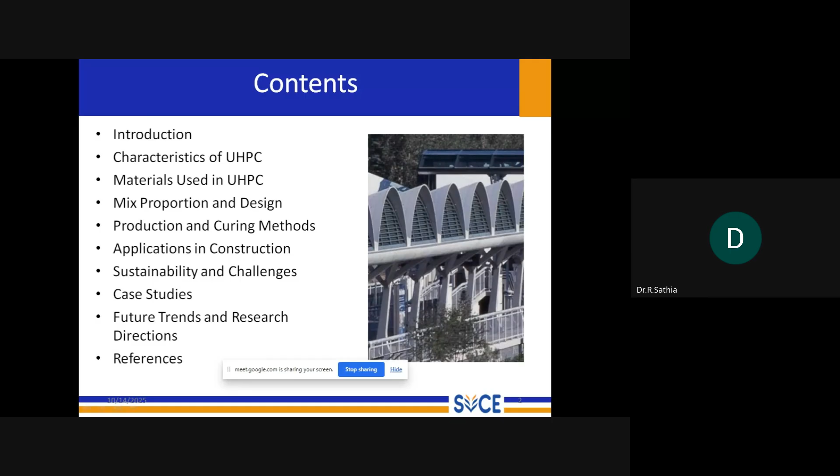Finally, we'll look into the future trends and research directions, where we'll explore the integration of AI, 3D printing, and bio-based materials. So finally, we'll conclude, and the last slide will be the reference slide.

Coming to the introduction of UHPC, which is nothing but ultra high performance concrete. As we all know, conventional concrete is made up of fine aggregate. In simple terms, to explain what this ultra high performance concrete is: in conventional concrete, we use cement, fine aggregate, coarse aggregate, and water combined together to make concrete. Whereas in ultra high performance concrete, the coarse aggregate part is eliminated.

It is mainly a cementitious composite material characterized by exceptionally high strength, durability, and ductility compared to conventional concrete. It is a material mainly made up of cement, supplementary cementing materials, admixtures, and fine aggregates. Here the coarse aggregate is eliminated to produce a uniform bulk mass.

So in order to improve the ductility, we are going to use fibers. Normally in practice, steel fibers are added to improve the ductility part of UHPC.

So UHPC is a class of advanced cementitious composite characterized by exceptionally high strength, durability, and ductility compared to conventional and even high performance concrete. So it is not just improved concrete, it is a fundamentally different material with a tailor-made microstructure.

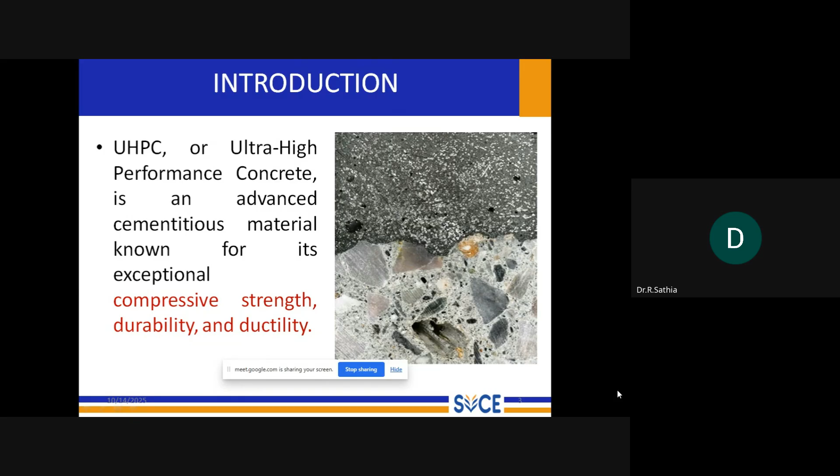Coming to the composition of UHPC, we can break down its composition into categories: the compressive strength, the post-cracking tensile strength, durability, and the unique properties of this UHPC.

Coming to the composition, it is a cementitious material. UHPC is a carefully engineered composite material. Its formulation involves optimized gradation of granular constituents, where particle sizes are selected to pack together with extreme density. So the particle packing density is a main important parameter to be considered in the design of UHPC.

It has a very low water cement ratio compared to normal conventional concretes, where it is 0.35 to 0.4 and up to 0.5. Whereas in ultra high performance concrete, the water cement ratio normally adopted is less than 0.25. So you can assume the comparison between your conventional concrete and your ultra high performance concrete.

So although the water cement ratio is 0.25, how is this workability achieved? That is the main thing which we have to concentrate on in this ultra high performance concrete.

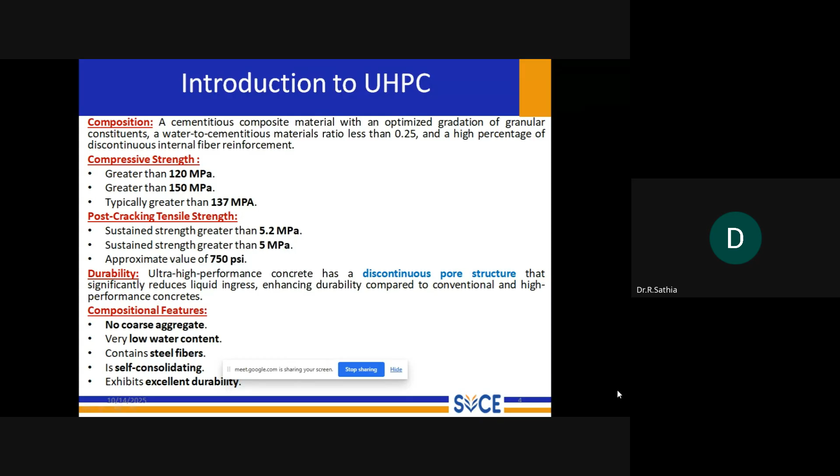To summarize, UHPC is a no coarse aggregate concrete with a very low water cement ratio, less than 0.25, and the ductility is improved by means of steel fibers. Although the water cement ratio is less than 0.25, it is said to be a self-consolidating or self-compacting concrete, and it also has excellent durability.

Although there are a lot of concretes now in practice, why and what is the need for this UHPC? UHPC typically utilizes, as we said, no coarse aggregate, low water cement ratio, fibers, and is self-consolidating with excellent durability.

So why do we need this? Why do we need such a material with low water cement ratio, with fibers added, and with accelerators or workability improving agents? What is the need for this UHPC?

Modern construction materials demand durability, corrosion resistance, and sustainability. Conventional concrete often struggles in harsh environments like marine regions or areas that use de-icing salts, which leads to cracking, corrosion of rebar, and high maintenance costs.

This UHPC directly addresses the limitations of inadequate toughness, poor crack resistance, and the frequent repairs needed in the case of conventional concrete. Furthermore, there is a shift in architectural trends and needs.

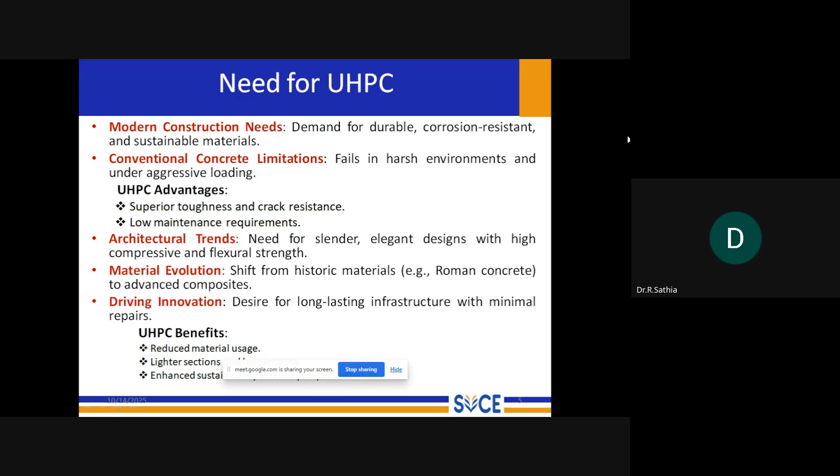Coming to the history of concrete, it is a hybrid material which combines the properties of three different types of concrete. The first is your self-consolidating concrete, the next is your high performance concrete, and the other is your fiber reinforced concrete.

UHPC is an easy flowing, self-consolidating material with the nature of SCC. It has the property of self-consolidating nature of SCC, so it fills most complex forms effortlessly.

The second is it possesses the superior strength and durability of high performance concrete. The next is the fiber reinforced concrete aspect, which gains increased ductility and post-cracking strength from the fibers added to produce this UHPC.

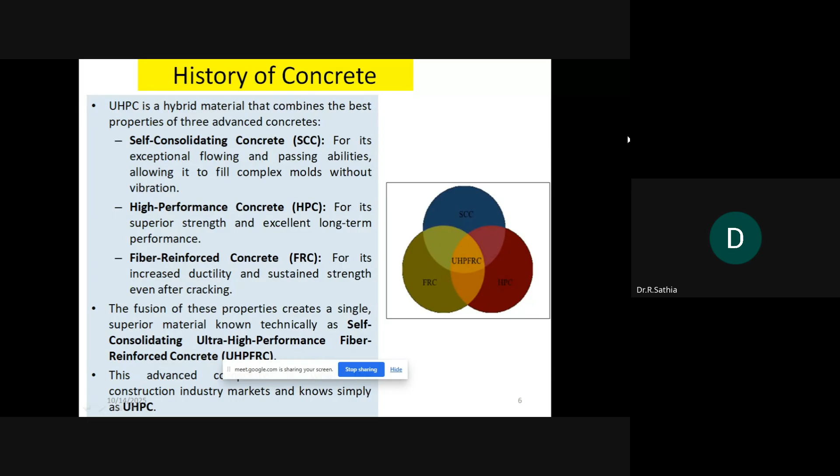By integrating these three powerful characteristics, we get a single advanced material known as self-consolidating ultra high performance fiber reinforced concrete, otherwise called UHPFRC, which is nothing but your UHPC.

Why this UHPC? New materials have always redefined what is possible in construction. This UHPC represents one of these fundamental shifts, much like the introduction of steel, when in olden days we built structures using only concrete.

Later, when steel came, it was another evolution of concrete. The UHPC presents one of these fundamental shifts, introducing much like the introduction of steel, leading to the creation of trusses and suspension bridges.

Next, UHPC was first developed or originated by the US Army Corps of Engineers in the late 1980s, and it was commercially launched in the year 2000.

Its availability prompted the Federal Highway Administration to initiate major investigations for highway uses, which subsequently spurred wide university research. The first bridge in North America was a pedestrian bridge in Canada, built in 1997. Globally, 34 research projects across multiple institutes were initiated and are ongoing, showing that the material is available and economically feasible.

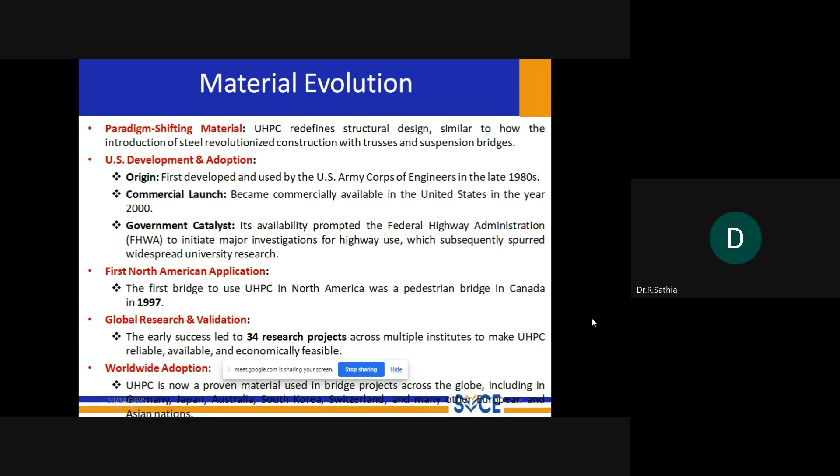Coming to performance criteria, as discussed, UHPC has a high compressive strength, 10 times that of traditional concrete. Compressive strength is the ability of the material to resist bending under loads. Normal concrete used in bridges has a compressive strength ranging from 20 to 50 megapascal, whereas UHPC has a strength range from 150 to 250 megapascal.

Coming to workability, it has a self-compacting mix. It can be developed using a self-compacting mix by achieving optimum particle size, and this workability is achieved by using a high range of super plasticizer.

Next is durability. While UHPC's strength is impressive, its durability further exceeds expectations. Durability is measured by how the material performs under extreme conditions - freeze-thaw resistance, chloride resistance, and abrasion resistance - all part of the durability aspects. UHPC's properties are similar to hard rock, resistant to chemicals, chloride, and fire, with zero maintenance.

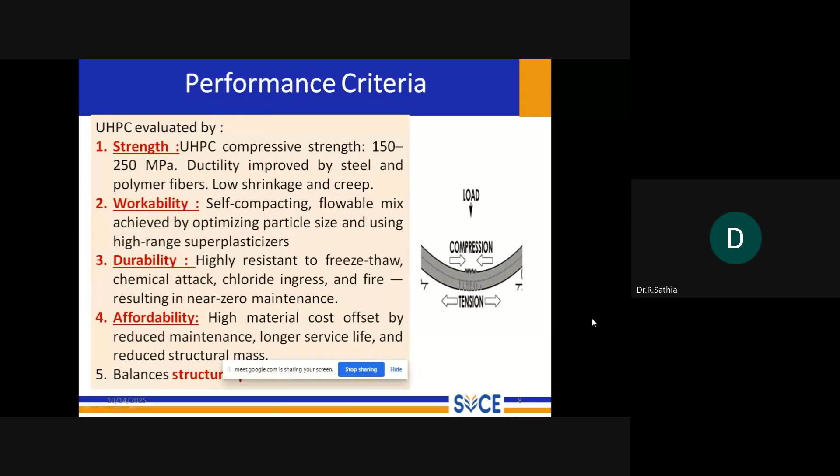Next is affordability. Although UHPC has high strength, thinner sections can be made. Comparing the cost of normal conventional concrete to UHPC: conventional concrete costs around 14,000 per cubic meter, whereas UHPC costs range from 2 lakhs to 2 lakhs 15,000 per cubic meter. So you can see the cost comparison between conventional concrete and UHPC.

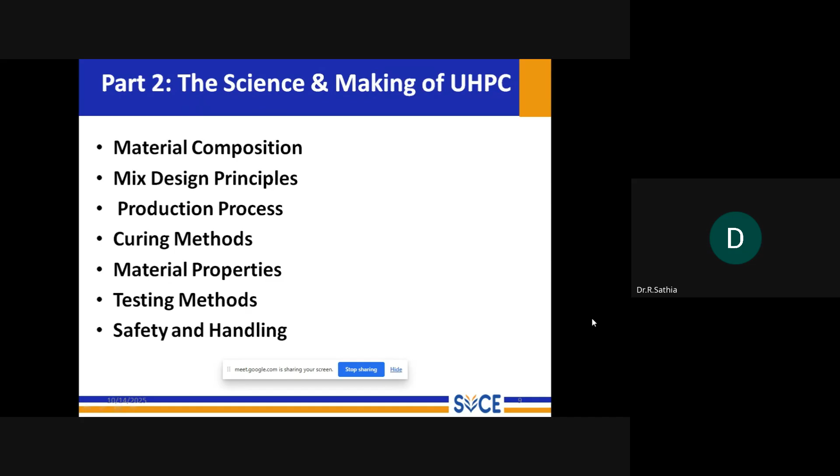The second part of my presentation is the science behind the making of UHPC, which comprises the material composition, mix design principles, production process, curing methods, material properties, testing methods, and safety and handling.

The materials mainly used for production of UHPC are powders, superplasticizers, and organic fibers. The general formulation of UHPC consists of high binder content, including Portland cement and supplementary cementitious materials like silica fume and quartz flour. Coarse aggregate is removed from UHPC, as already discussed, to avoid formulation of high voids and to create a densified interfacial transition zone around the aggregates. This elimination of coarse aggregate eliminates the weakest region within the matrix.

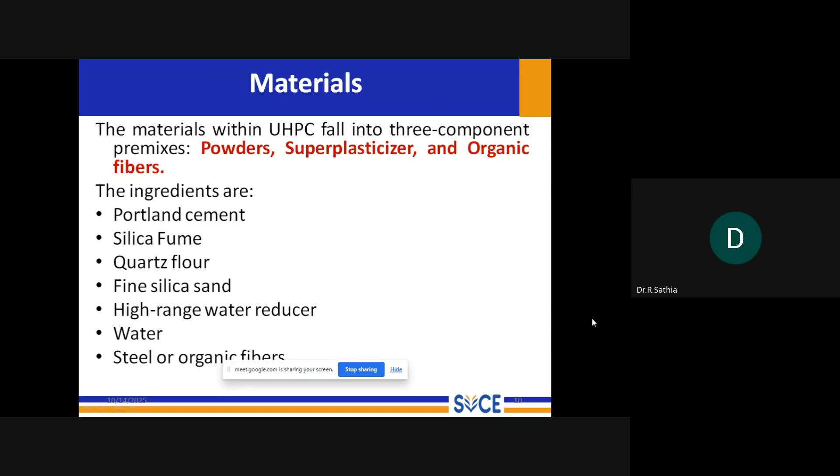Next, the coarse aggregate is replaced - now that we've eliminated coarse aggregates, how is strength achieved, and how do we achieve dense packing? The coarse aggregate is replaced by well-graded fine sand to ensure high packing order. This UHPC mix design incorporates two different types of chemical admixtures: high range water reducing admixtures and concrete setting accelerators. Finally, micro-sized steel fibers are incorporated to increase mix strength and ductility.

Here you can see the proportion composition of UHPC. This is not the universally adopted proportion, but one of the proportions used in preparation of UHPC. Portland cement is 712 kg per cubic meter, fine sand is 1020 kg per cubic meter - since we've eliminated coarse aggregate, UHPC does not contain it. Silica fume is 231, ground quartz is 211, high range water reducing admixture is 30.7 kg per cubic meter, accelerator is 30, steel fibers are 156 kg per cubic meter, and water added is 109. In normal conventional concrete, the water normally adopted is 185 kg per cubic meter, so you can see the comparison in the amount of water added for UHPC.

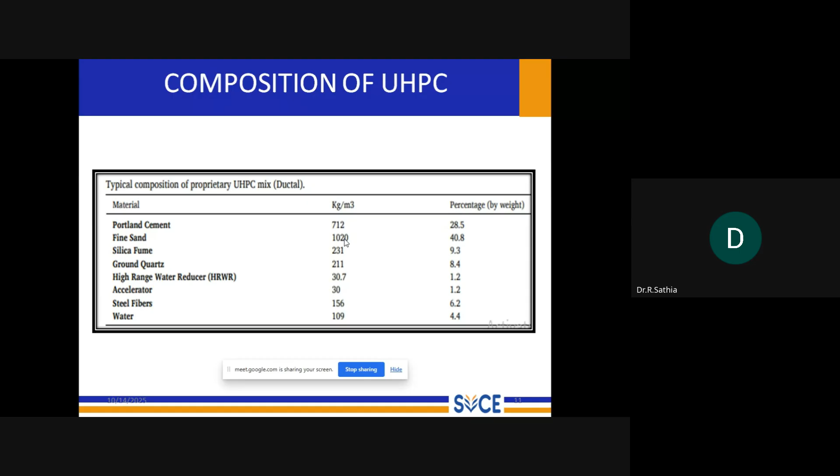This figure represents the particle packing of this UHPC. Here you can see the yellow one, which is the coarse aggregate, and the smaller one is the fine aggregate, and the cement paste is represented by this blue color.

Here you can see how in case of UHPC the pores are tightly packed, and you can see the pores in between, comparing the particle packing density of conventional concrete and UHPC. You can see how the pores are evenly fully packed, and the supplementary cementing materials, filling powders, and fibers which are added are fully packed to form a dense matrix.

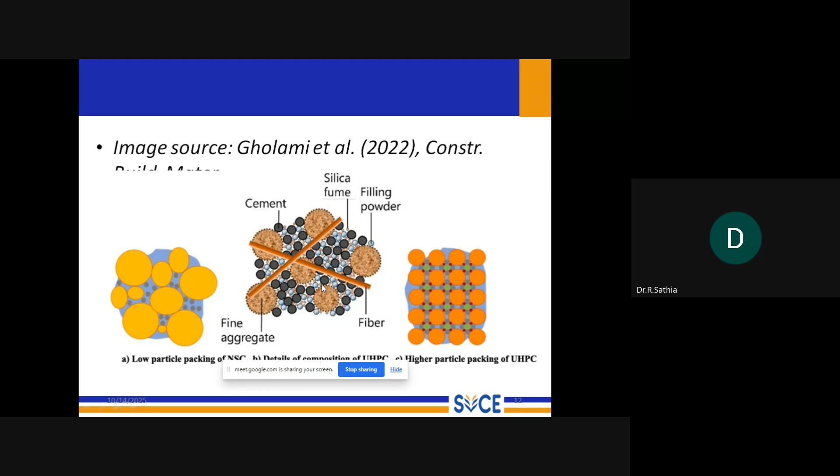Next we'll see the detailed mixing procedure, the mixing sequence of this UHPC. I'll just quickly go through this.

The dry powders, whatever we have taken - that is cement, supplementary cementing materials which may be silica fume, blast furnace slag, and fine silica sand - are dry mixed for 2 to 3 minutes at a uniform speed so that a homogeneous dry mix is achieved.

Then once it is done, the liquid is added. Once our dry mix is perfectly homogeneous, we'll transform the powder into a paste. We gradually add the large portion of the total mixing water, typically between 75 and 90%, along with the dosage of high range water reducer or superplasticizer. As we continue, the dry powder absorbs the moisture and the superplasticizer, turning into a thick cohesive paste.

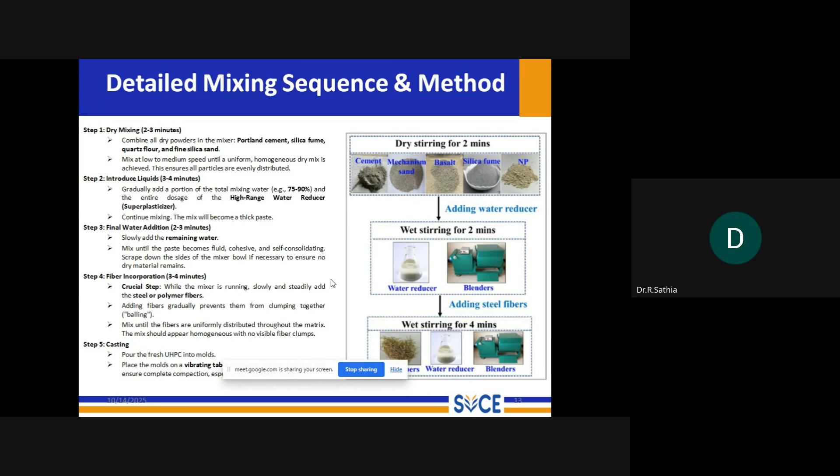The last step is casting. The casting is similar to that of normal conventional concrete - it is poured into the mold which is already prepared. Although we say it is self-consolidating concrete, it is normally kept on the vibrating table and then cast.

Next, curing. In conventional concrete, hydration is the main thing which enhances the strength of the concrete. But here the water cement ratio is less than 0.2. So then, what is the hydration? What about this hydration effect? Here, this strength is achieved mainly by means of the densely packed UHPC.

The curing is done immediately by covering the exposed surface with a plastic sheet or by spraying a compound to prevent moisture loss. Then the mold is kept at room temperature of 20 to 25 degrees for 24 hours. After that, it is demolded, and final curing is done at a temperature of 20 degrees and at a relative humidity greater than 95%, or in a water tank for 28 days.

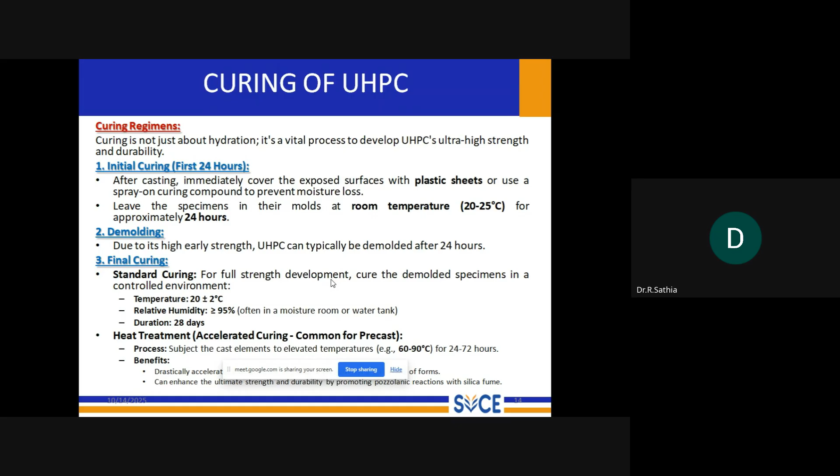Commonly, if you are using a precast element, it has to be cured at a controlled, elevated temperature of 60 to 90 degrees. The precast elements can be cured for 24 to 72 hours at this elevated temperature. The heating provides strength gain - it drastically accelerates the strength, which enhances simultaneously the strength and durability, achieved by promoting pozzolanic reactions with the silica fume.

Now let's move into the third part of UHPC.

So now we have learned, in the last 30 minutes, what is the science behind UHPC and what is the historical background, and what is UHPC. Now we will see the real world applications, focusing on how this revolutionary material is being used in the construction industry, with case studies related to bridge construction, and we'll also look into the exciting potential in architecture.

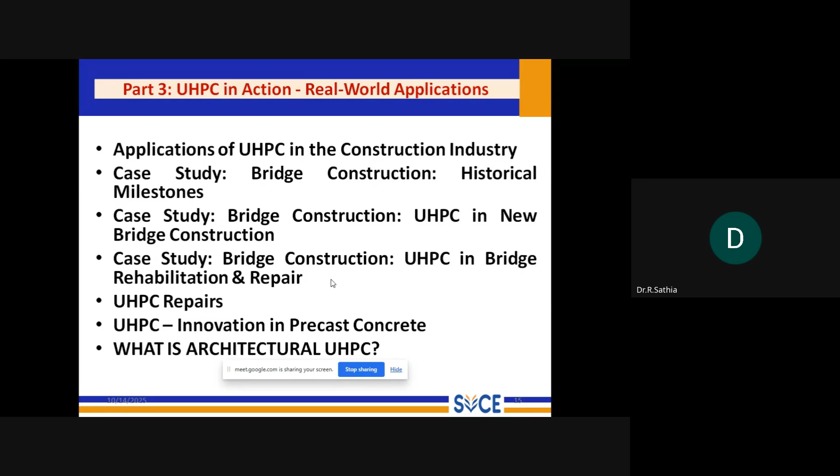We are going to see the application of UHPC in the construction industry, the innovative projects and innovations in precast concrete, and what is meant by architectural UHPC.

The application of UHPC in the construction industry is primarily in the construction of bridges. In bridges, it is mainly used for the construction of bridge decks, which is considered the main primary superstructure of a bridge. The bridge deck is the one which carries heavy traffic load.

This UHPC, which provides a strength of around 200 to 250 megapascal, is primarily used in the casting of the bridge deck. Not only in the bridge deck, it is also used in the connection between the pier and the bridge deck.

Due to this high cost, UHPC is primarily restricted to very important projects. The first UHPC was used in North America in the year 1997 in the construction of a pedestrian bridge. Next, UHPC became available in the US from 2000.

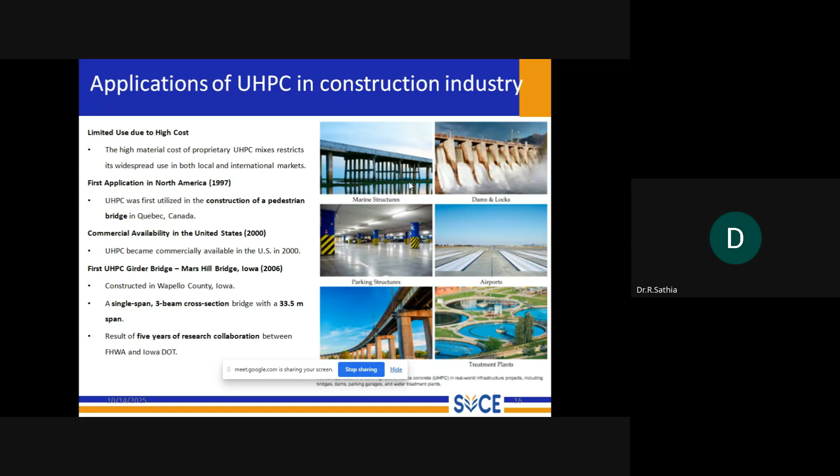The applications of UHPC in the construction industry are mainly in construction projects and building of bridges. Over 200 bridge projects in the US have used UHPC mixes. This application includes new bridge construction and the maintenance of existing structures.

Although UHPC is mainly used for the construction of new structures, another important application of UHPC is that it is used to strengthen structures, to repair structures, or used as an overlay of structures.

The major contribution of UHPC in bridge construction and maintenance is that entire bridge structures are made up of UHPC elements. It is also used as a connector joining precast elements with other components, to strengthen existing piers, to strengthen bridge decks, and as an overlay on bridge decks for improved long life of the structure.

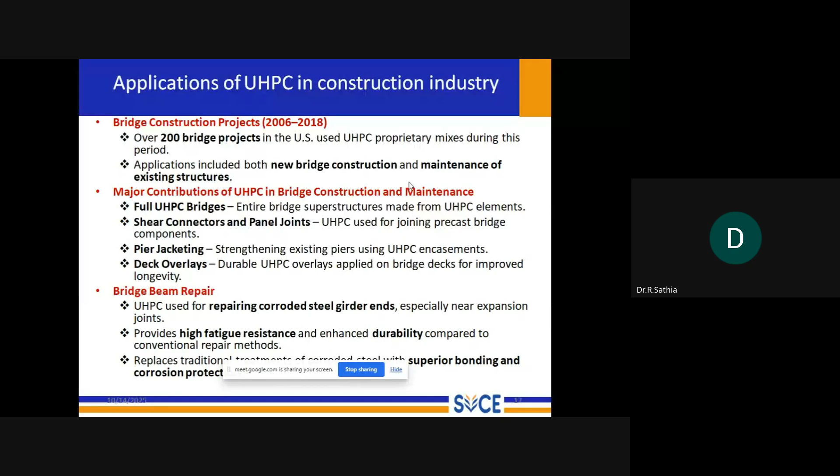In this UHPC, we use steel fiber, which provides superior bonding, and it also eliminates corrosion.

If you look at the historical milestones in bridge construction, the revolutionary nature of UHPC started with the project at Sherbrooke pedestrian overpass in Canada. This bridge is a landmark in engineering history because in 1997 it became the world's first bridge to use UHPC. This bridge was built using a single massive 60-meter span, which used 6 precast post-tensioned space truss elements.

This bridge was constructed using reactive powder concrete, which was the earlier version of UHPC, with a compressive strength ranging from 200 megapascal to 350 megapascal.

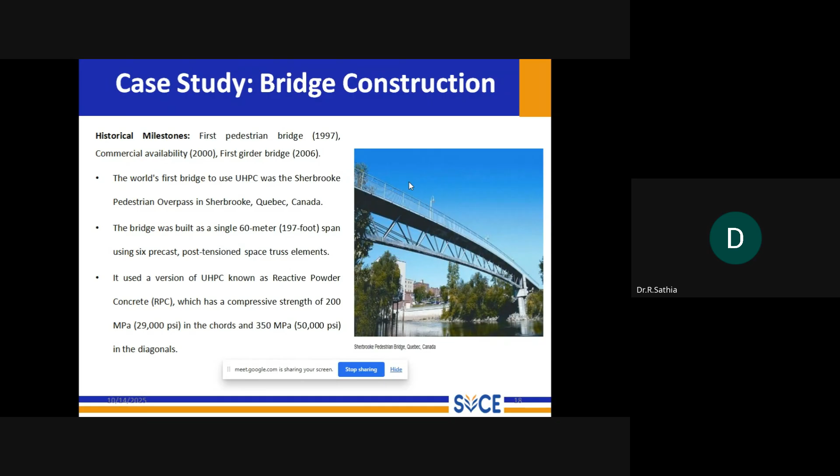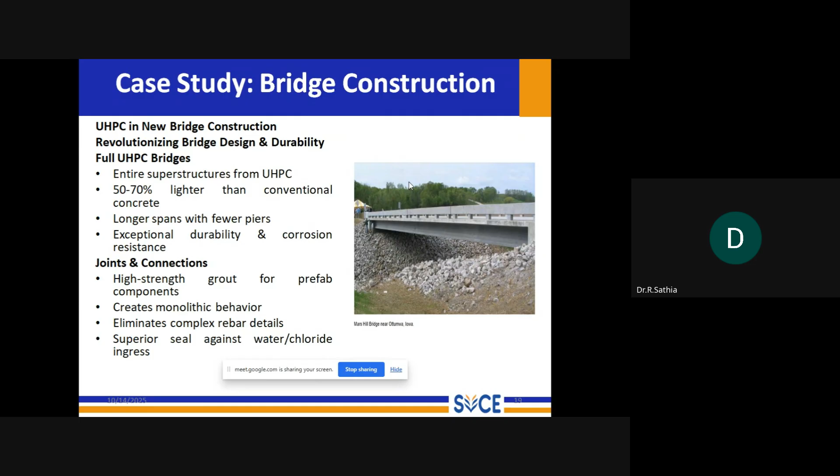Next, you have another UHPC application where the joints are made using UHPC with high durability and corrosion resistance.

What is the next application of UHPC in bridge repair systems? Beyond new construction, UHPC is truly transforming how we maintain and strengthen our existing structures, which tends to be a costlier process.

First, we'll see pier jacketing. This technique involves applying a thin UHPC encasement around existing bridge columns. Why is this so effective? It provides far superior confinement compared to a normal steel jacket system, and it enhances seismic resistance.

Another application of UHPC is in deck overlays. To strengthen the deck, a 1 to 2 inch protective layer is provided over the existing deck by means of UHPC. It provides an impermeable, crack-resistant surface with increased load-carrying capacity, which provides a long-term solution and cuts down the frequent repair of deck slabs.

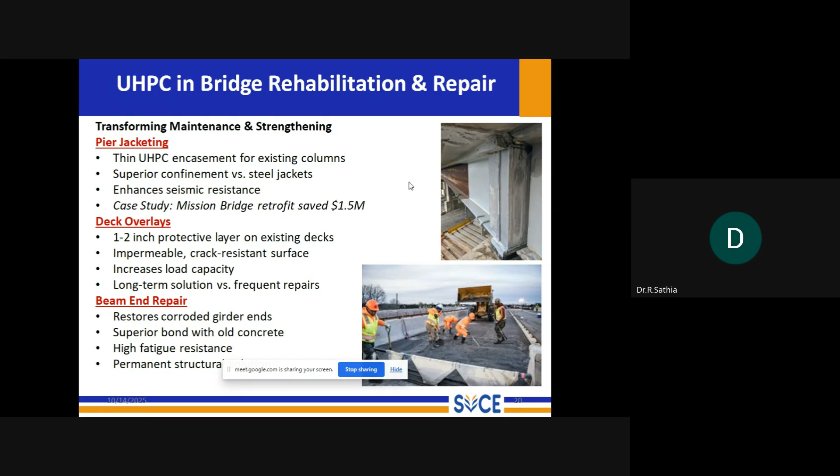UHPC is also used to restore corroded girders, which constitute a major cost. UHPC provides a solution for this beam end repair system, and it provides superior bond with old concrete, along with high fatigue resistance.

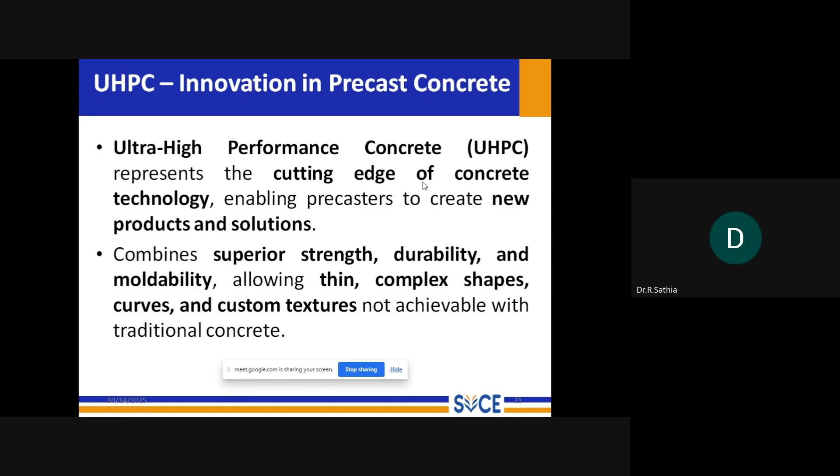If you see the evaluation innovation in the precast system, the production of UHPC precast elements can be done in a controlled environment. For mass production, we go for precast concrete elements, normally the bridge deck, which is mainly the deck slab made up of precast. This ultra high performance concrete represents a cutting edge of concrete technology, which enables precasters to create new products and solutions. UHPC provides strength, durability, and moldability. You can make any type of structure with this UHPC.

Coming to architectural UHPC, what is this? This architectural UHPC is a specialized formulation of ultra high performance concrete, engineered to combine exceptional mechanical properties with aesthetical versatility. It enables the creation of slender, complex and sculptural elements that are both structurally sound and visually striking. You can see these figures.

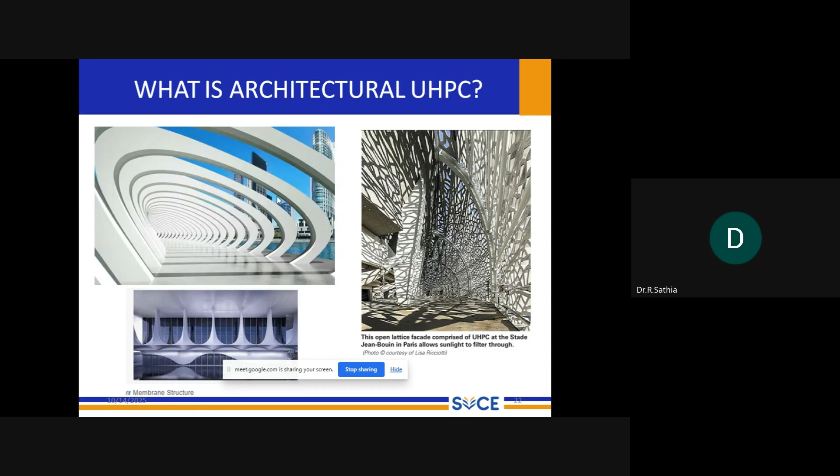Since it is a thin structure mainly used for architectural purposes, the fibers may be made up of polyvinyl alcohol fibers. The compressive strength ranges around 170 megapascal, and the flexural strength ranges around 20 megapascals.

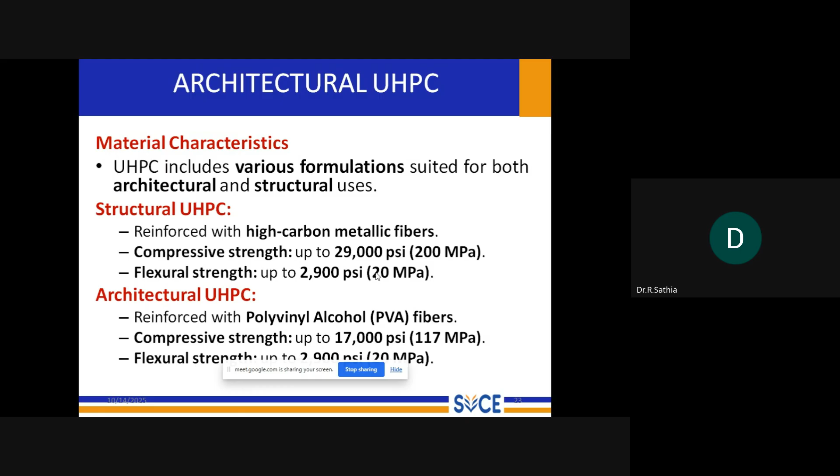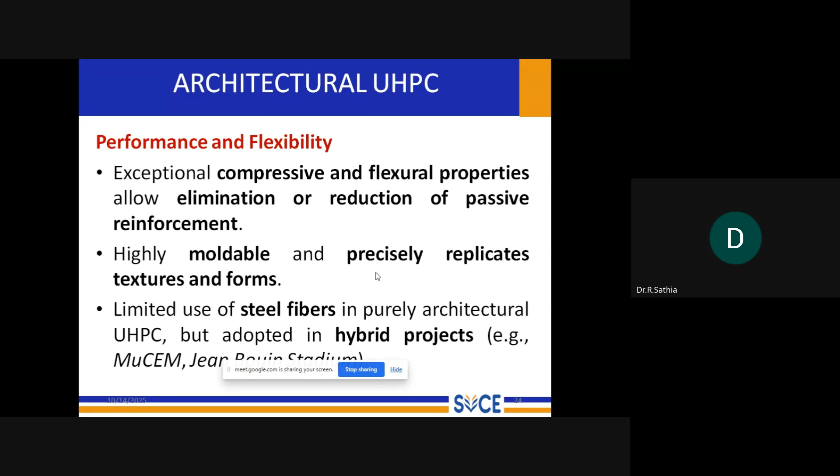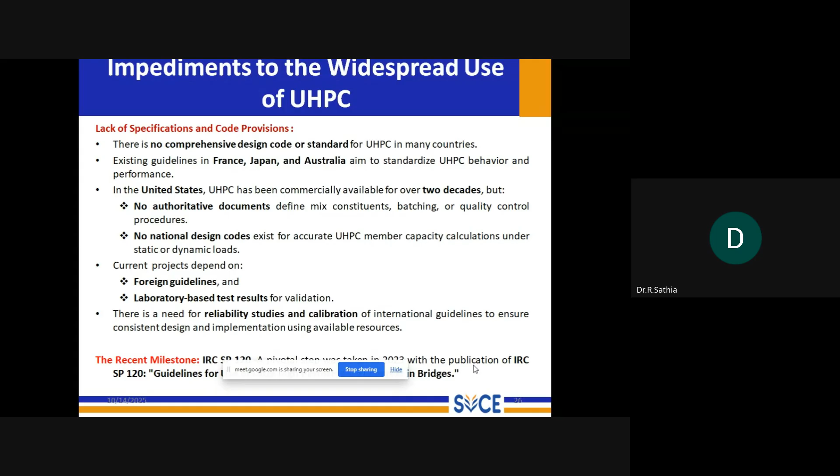The next hindrance in UHPC is a significant gap in industrial experience. Contractors and subcontractors often lack hands-on experience with the complex multi-step batching and specific curing regimes of UHPC. This unfamiliarity leads to hesitation in adopting UHPC for large-scale projects.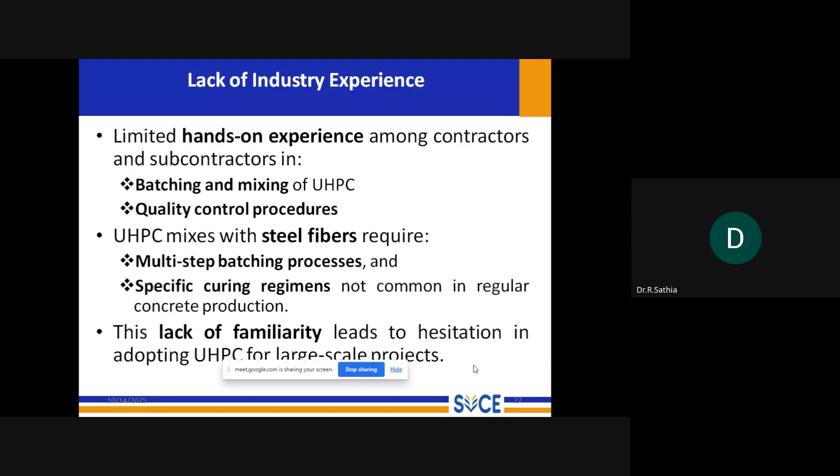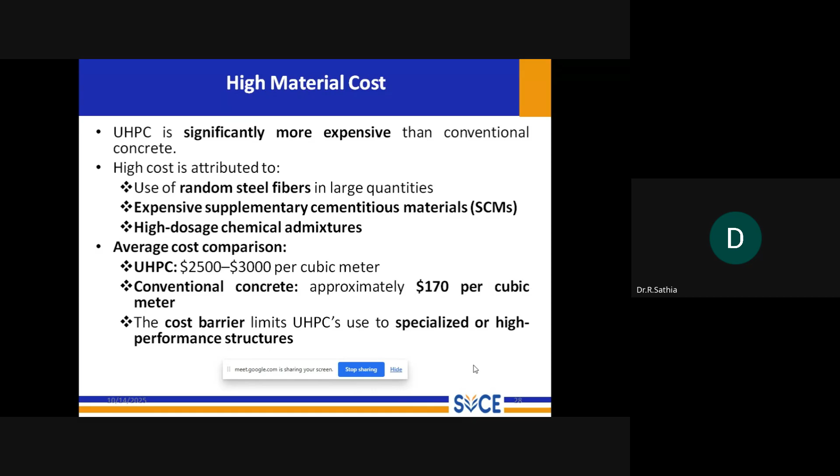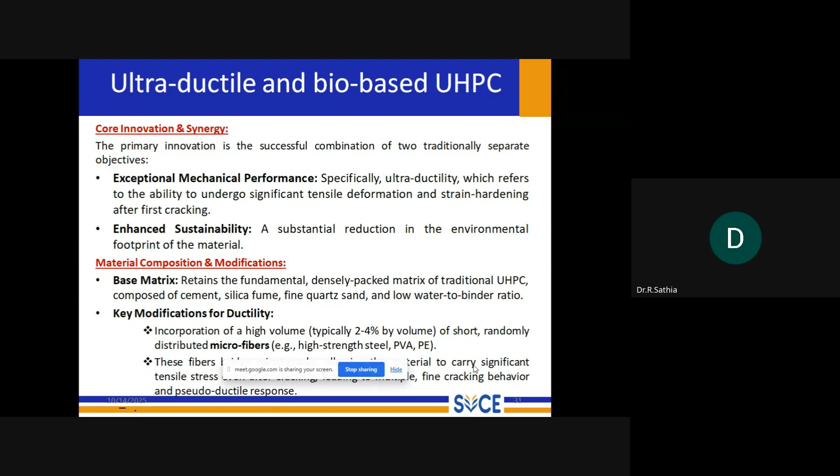Next, we have ultra-ductile and bio-based UHPC. It has ultra high ductility, which refers to the ability to undergo significant tensile deformations and strain hardening after the first cracks. For sustainability, it's a reduction in the environmental footprint of the material.

Next is bio-based UHPC development. The usage of bio-derived additives and bio-based fibers can reduce the usage of steel fibers in the production of UHPC. Partial replacement of cement with bio-based pozzolans or fillers, such as rice husk ash, or biochars, can reduce the usage of cement in UHPC production. Bio-based fibers derived from bamboo, flax, hemp, and sisal can be used to replace steel fibers.

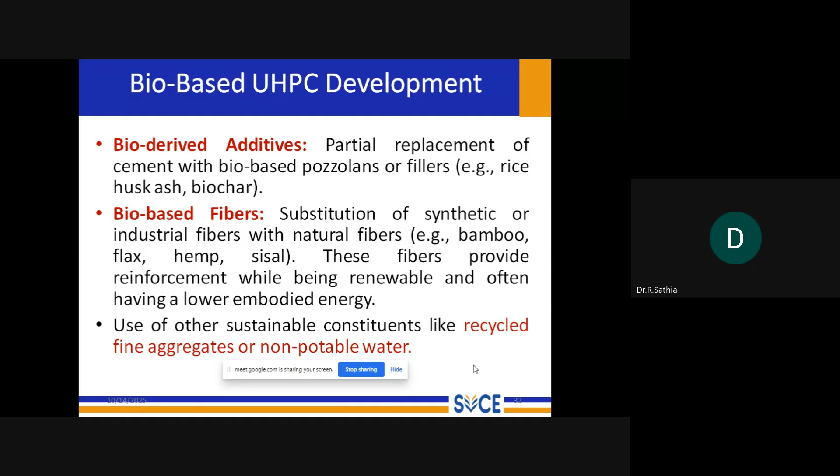The other thing is you can use recycled aggregate for the production of UHPC. Next is UHPC in structural health monitoring.

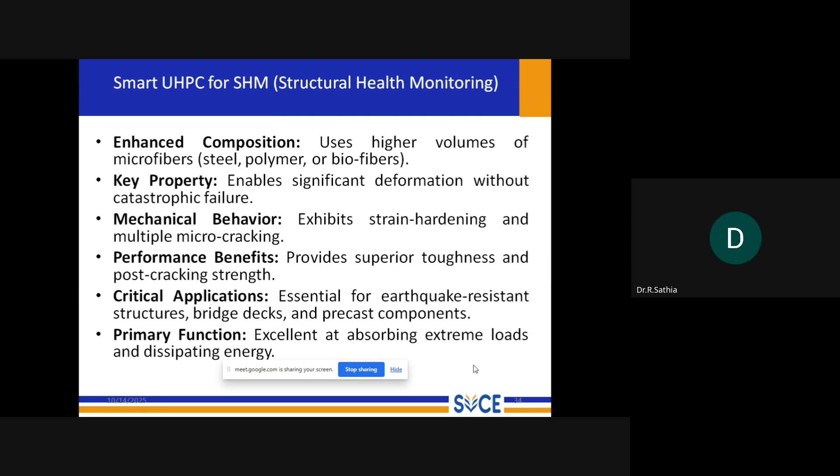Self-sensing UHPC typically consists of a dense cement matrix embedded with functional fillers. Steel fibers are commonly used to form an interconnected conductivity network, while nanocarbon materials with piezo-resistive effects can be used as a replacement for steel fibers. You can sense the life of the structure using this piezoelectric or piezo-resistive effect. By the use of these piezoelectric or resistive fibers, you can sense the lifetime of the structure.

So the usage of steel fibers can be cut down, and carbon nanotubes, carbon nanofibrils, and nano graphite platelets can be used as fillers. The usage of these fibers can enable real-time structural health monitoring systems for civil infrastructure.

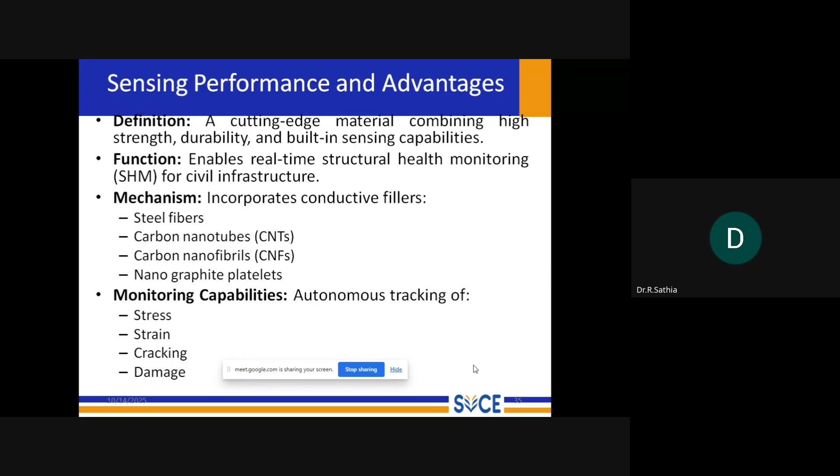Next part is the integration of AI for predicting the performance of this ultra high performance concrete. The true power of self-sensing UHPC is unlocked when we pair it with artificial intelligence. This integration creates a powerful system for predictive modeling. AI enables us to accurately forecast the material's mechanical properties, durability, and even its own sensing performance. This is considered a game changer, supporting advanced structural health monitoring systems and allowing engineers to optimize the mix design.

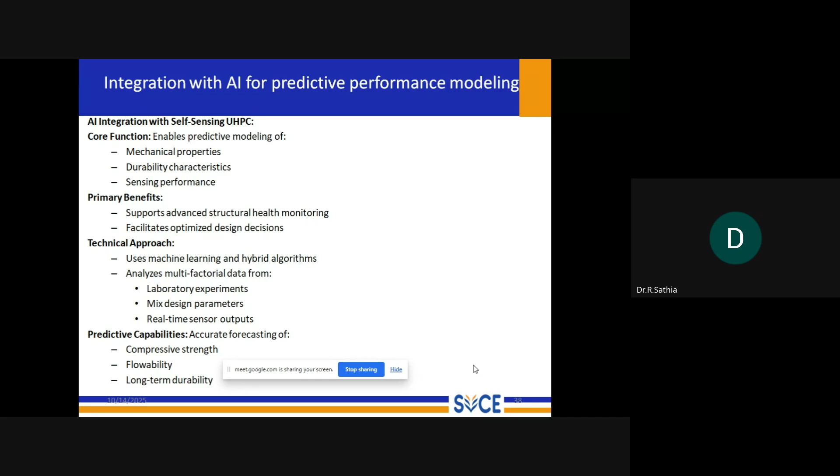So how can this be achieved? It can be achieved only through AI approaches. Specifically, machine learning and hybrid algorithms can be used to optimize the design, using real time sensor outputs. As a result, AI can accurately predict properties like compressive strength, flowability, and long-term durability. This helps us move from reactive maintenance to truly predictive and resilient infrastructure management.

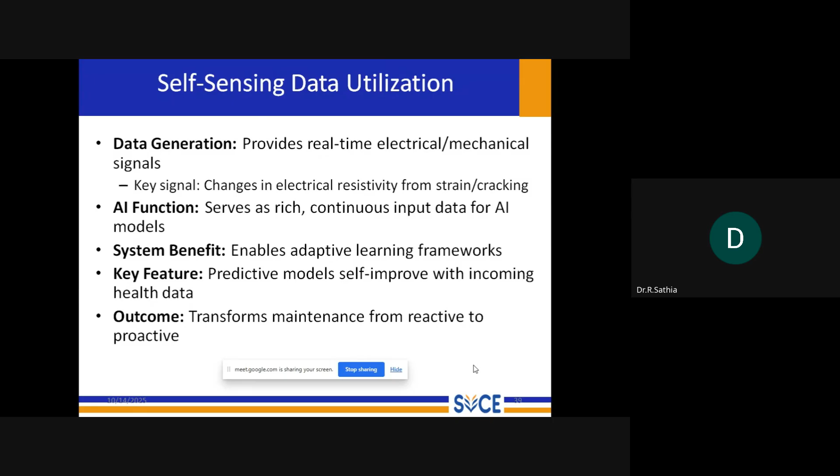To model this complex behavior of UHPC, researchers have used powerful machine learning algorithms and techniques like gradient boosting, decision trees, support vector machines, and neural networks to develop UHPC design procedures. You can also use explainable AI tools such as SHAP, though I cannot explain much more on these machine learning techniques. These are the commonly adopted techniques for UHPC production, along with advanced methods like hybrid models combining multiple approaches and real-time data fusion techniques, which can be used for data-driven design of UHPC.

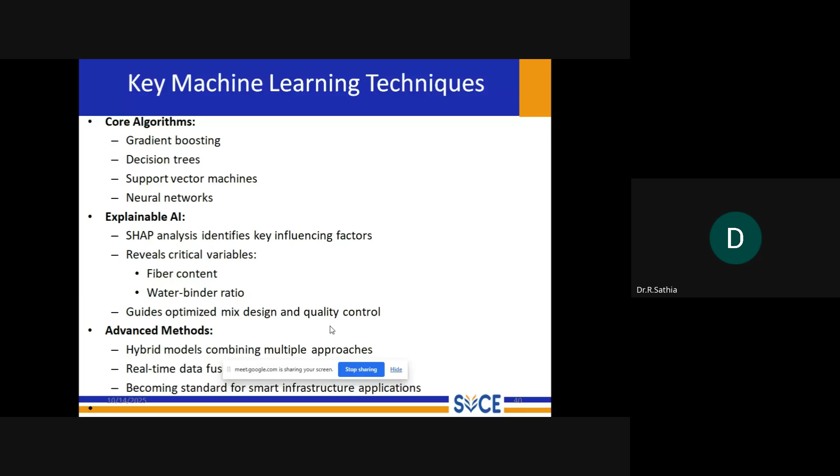Next, we are going to see the properties of UHPC at elevated temperature. Fire poses a major threat to the safety and structural integrity of reinforced concrete. ISO 834 is an internationally recognized standard providing time–temperature fire curves for testing structural elements. Several regional standards are used to assess the thermal performance of RC elements. UHPC provides good resistance to fire at elevated temperatures.

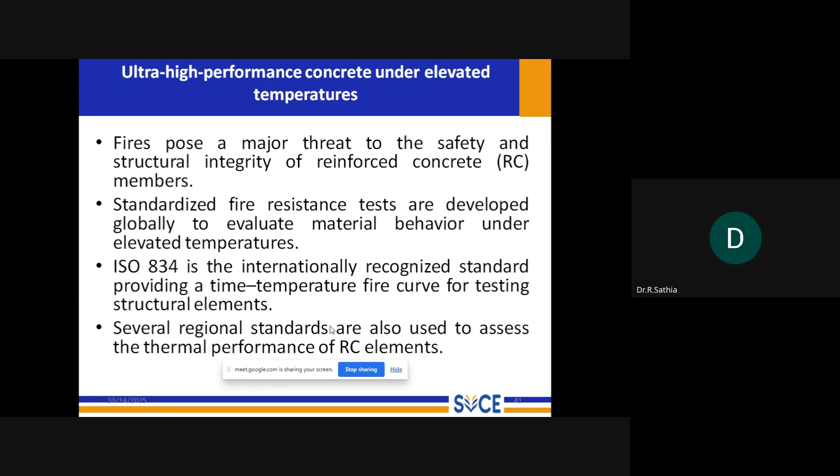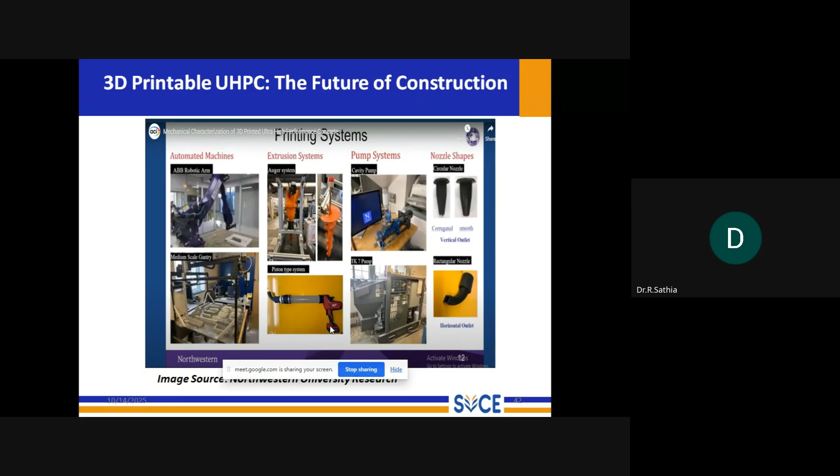Next in the evolution of UHPC is 3D printable UHPC. Here you can see the different types of printing systems mainly used for printing UHPC. The robots, pumping systems, and extruder systems are the components used in the printing of UHPC.

This printing system has a three-axis gantry robot. The core frame of the printer is a gantry structure which moves along this direction to print the system. It has a three-axis system, and here you have the piston, which is a critical component that defines the printing specialty. Next is the rectangular nozzle—you can change the nozzle shape to whatever shape you require and print the system accordingly.

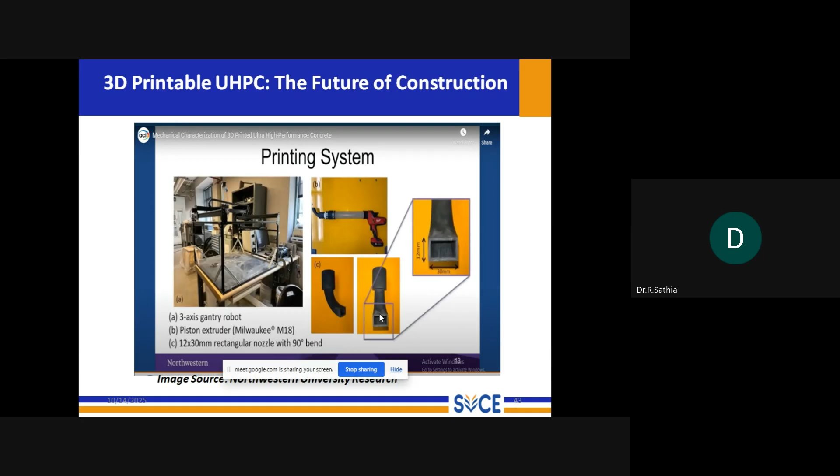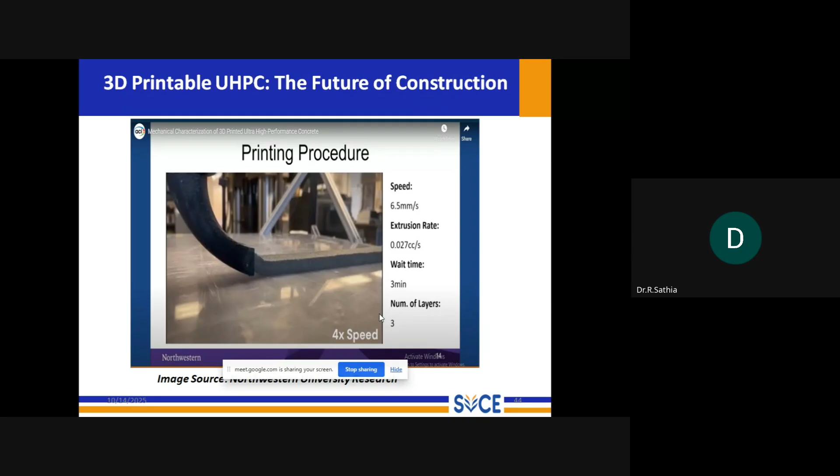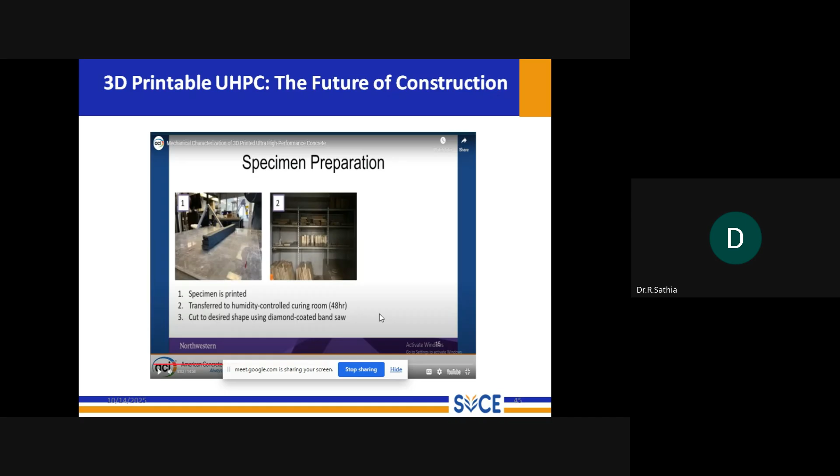Next we'll see the research and future directions. As we push the boundaries of UHPC toward intelligent self-sensing systems, there are a lot of challenges.

The first challenge is dispersion. Incorporating nanomaterials like carbon nanotubes is difficult because they tend to clump together. The usage of nanomaterials in the production of UHPC is an area we can look into and research further.

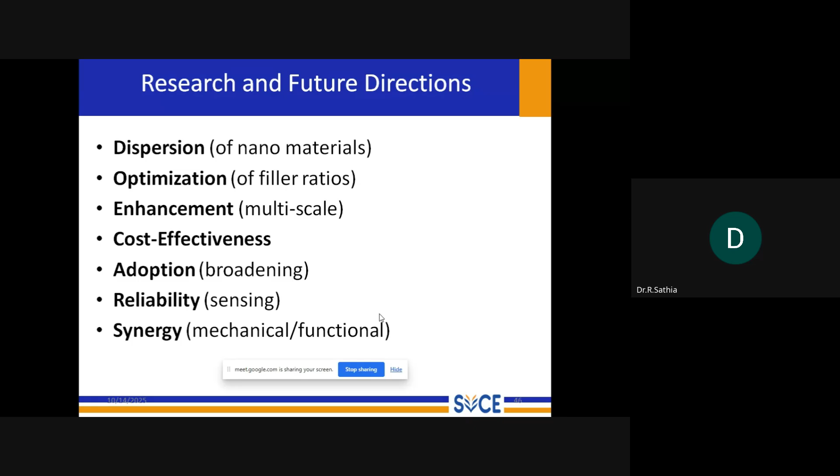Next, optimization of the filler ratio is another key area where fibers have to be optimized for UHPC production. Since UHPC is not used at a wider scale, research can be enhanced to enable its production at a larger scale, and further research can reduce production costs. The use of UHPC has to be broadened so it can be widely applied. The sensing system of UHPC should be improved using fibers with sensing capacity, and the functional and mechanical properties can be further improved with optimum mixes and production systems—these are future directions for UHPC research.

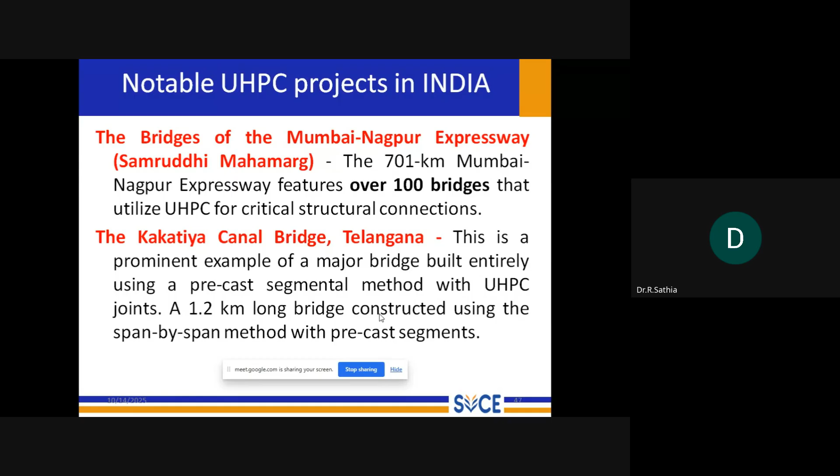In India, notable projects include the bridge constructed in Telangana and the Mumbai-Nagpur Highway Expressway. It's a 701-kilometer expressway which features over 100 bridges that have utilized UHPC for connections. Another is a major bridge in Telangana built entirely with precast segmental elements—a 1.2-kilometer-long bridge constructed using the span-by-span method with precast segments.

For future applications, we have to look into fully closed-loop systems where sensing UHPC and AI communication models are developed for real-time self-monitoring and self-reporting with minimal human intervention. Next is optimization of structures, predictive models, and early warning systems—these are the future applications where UHPC has to be developed.

Next is the sustainability: the effective utilization of available resources and efficiency, which uses the materials on the life cycle management, and also the safety aspects.

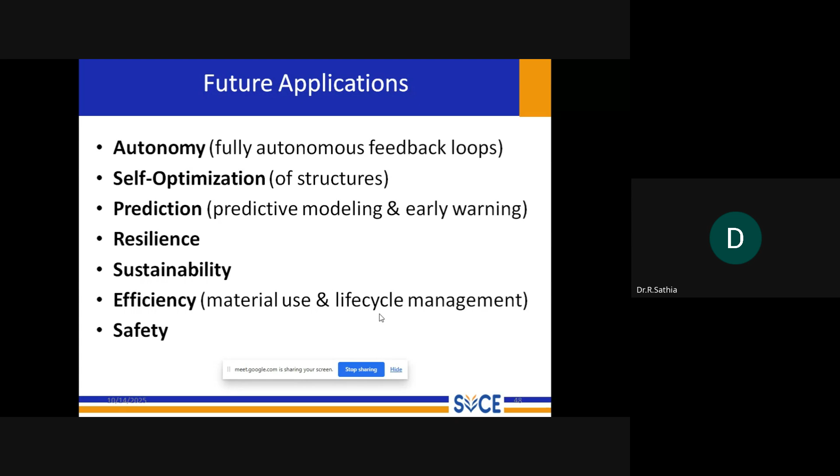This UHPC has to be used for this safety. So if you see the roadmap for future research, more focus has to be done on UHPC towards sustainability, standardization, and smart functionality. The integration of AI, 3D printing, and green materials has to be furthermore developed. Also, generation of codes or development of specific design procedures on code provisions has to be developed for this UHPC.

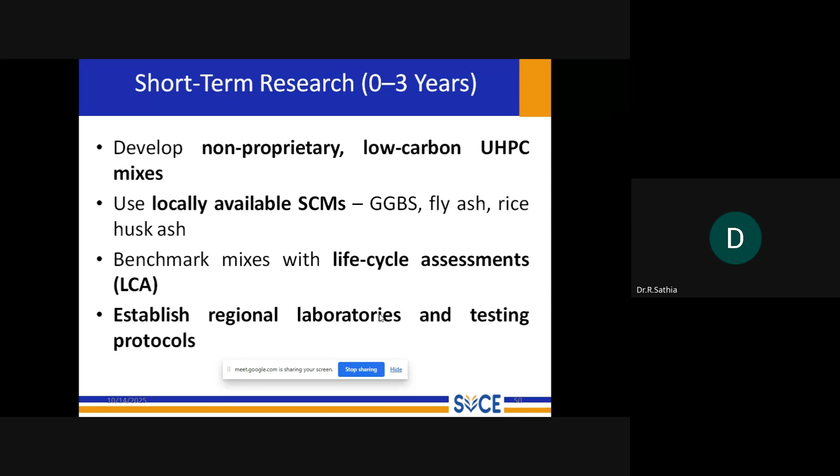For short-term research, you can work on low-carbon UHPC mixes. Where locally available, you can develop UHPC with supplementary cementing materials such as GGBS, fly ash, and rice husk ash. Also, you can work on life cycle assessment of UHPC structures, and establish regional laboratories and testing protocols for UHPC.

For medium-term research of about 3 to 7 years, we can work on development of design standards and codes, and we can also involve in developing training and upskilling the contractors, subcontractors, and engineers to work on UHPC.

Also, optimization of fibers, fiber mixing, and curing techniques is another project area where we can work for fiber dispersion and curing. Also, pilot scale projects for bridges and precast systems can be conducted.

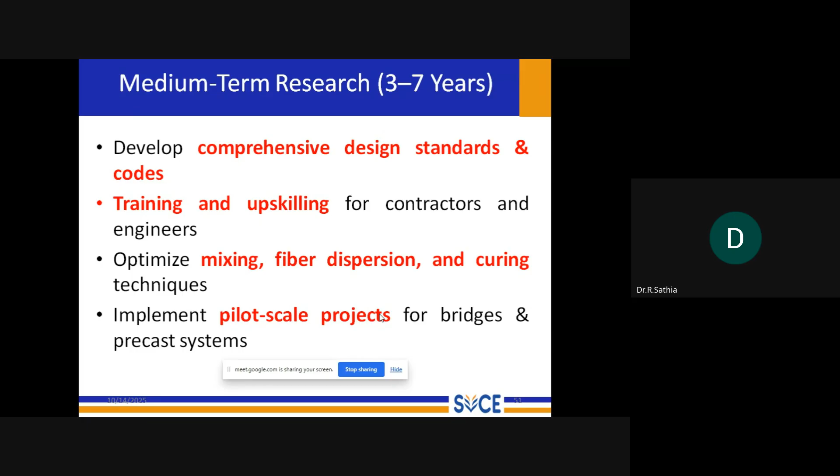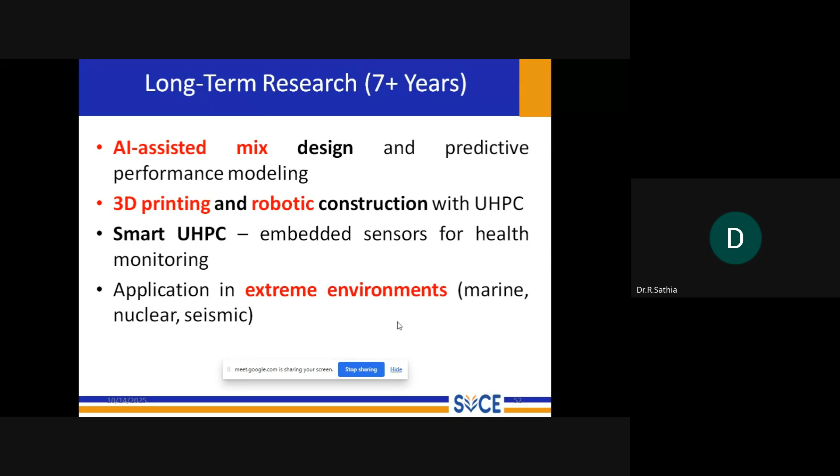For long-term research of more than 7 years, you can work on development of AI-assisted mix design, 3D printing techniques, and application of UHPC in extreme environmental conditions, where research can be done for a longer time.

Next, effective utilization of eco-friendly materials and carbon neutral additives, which is self-sensing, is another area where we can work. And bio-based fibers such as hemp, sisal, and flax. Not only these, we can go with different materials for the production of UHPC. Recycled aggregates can also be used for this production.

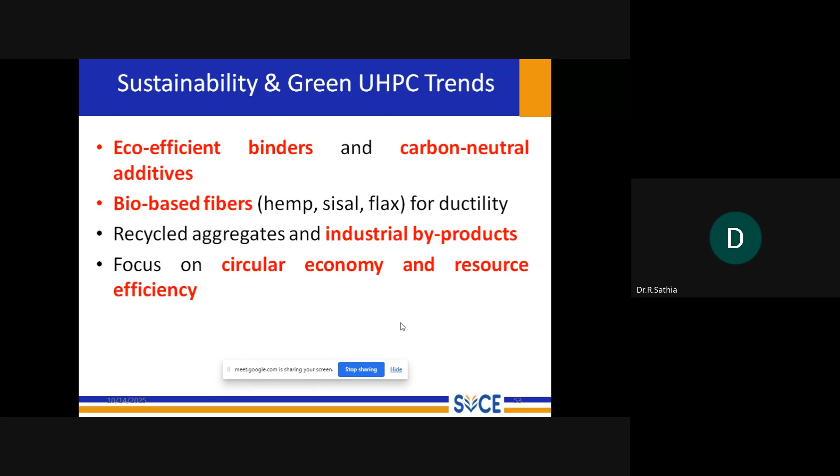More focus can be done on the usage of recycled aggregates for the production of UHPC.

More than 200 bridge projects have been used in North America, and also in Asia, China, and Japan. There is a rapid growth in the usage of UHPC. In India also, a lot of projects have been done with UHPC.

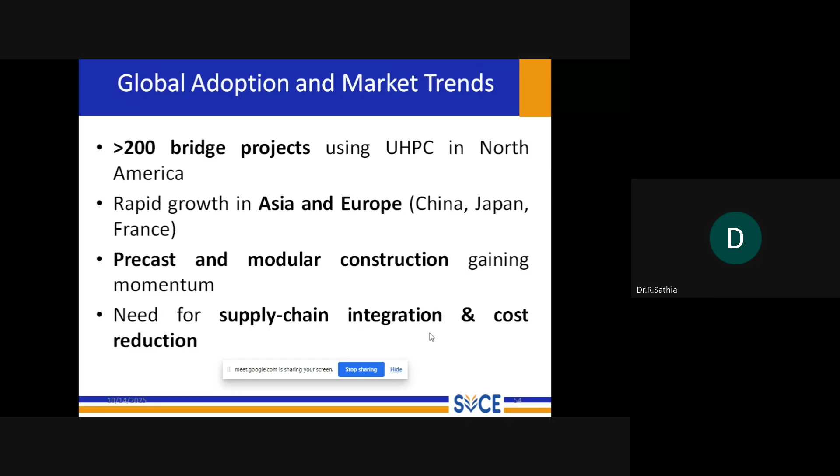To summarize, UHPC is a concrete with no coarse aggregate. It is mainly made up of cement, fine aggregate, and supplementary cementing materials, retarders, and accelerators, and super plasticizers are used to improve the workability. It's a low water content concrete which mainly uses steel fibers. The steel fibers can be replaced with biofibers, which is an area where we can work.

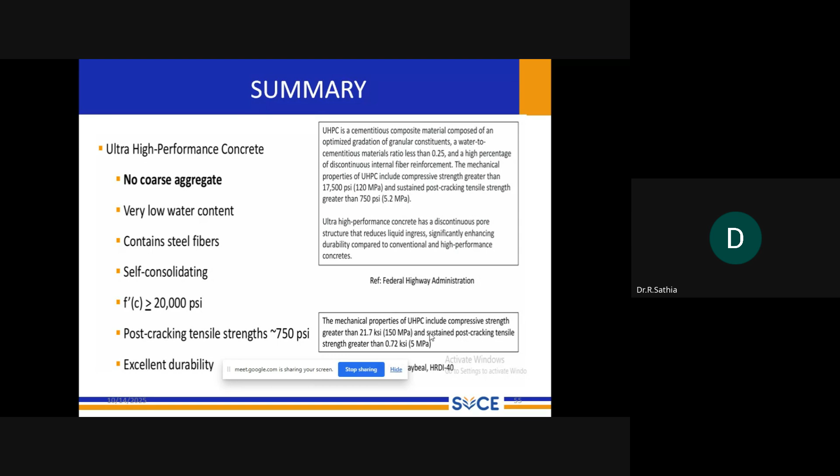It has a compressive strength greater than 150 megapascal and a post-cracking strength of 5 megapascal, and it has excellent durability. Coming to workability, it is a self-consolidating concrete which doesn't need any vibration.

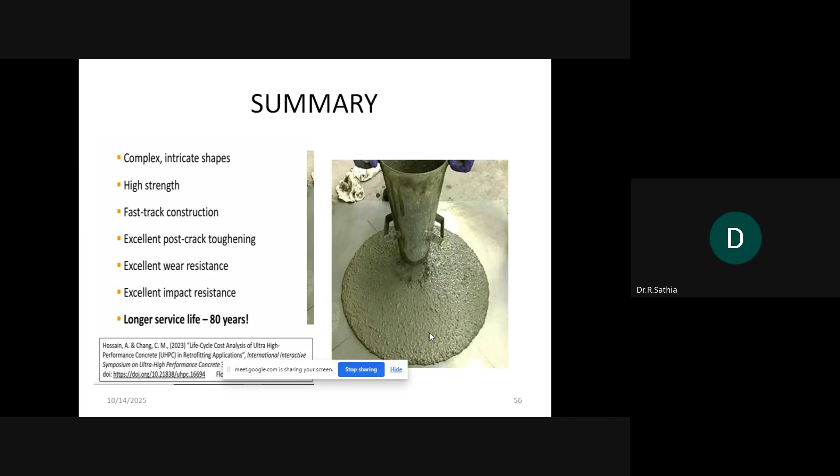It is mainly used in congested reinforcement or heavy structures. In case of bridge structures where there are connections, heavy reinforcement will be there. In such cases, achieving the strength with normal conventional concrete is quite difficult. So you can use UHPC, which will provide the necessary strength.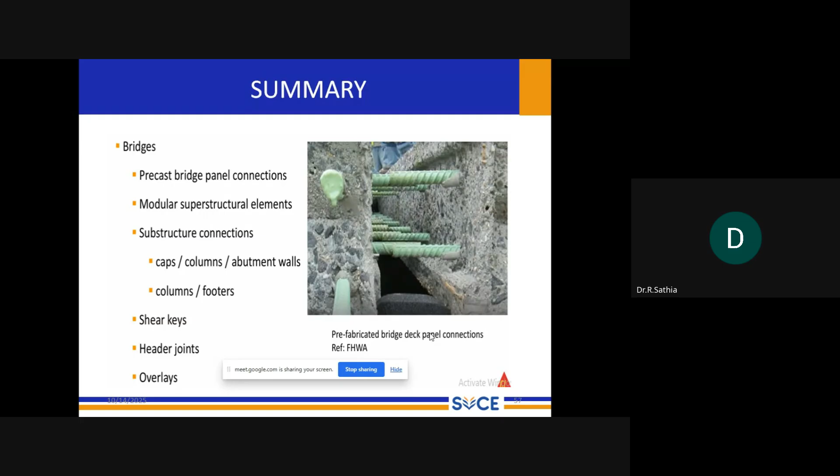It's mainly used in bridge panel systems, or it can be used as an overlay of deck, or used in repair systems, or it can be used to strengthen existing structures. Mainly bridges are constructed using this ultra high performance concrete, and precast elements are also used.

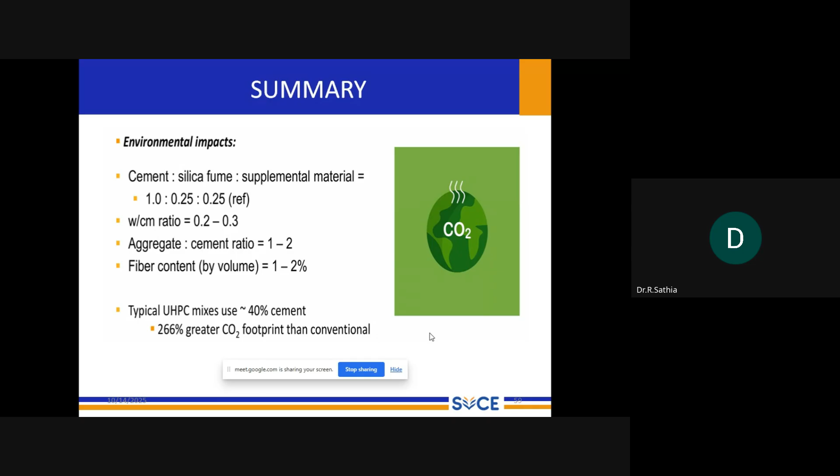The usage of UHPC reduces the use of cement and steel, which provides a sustainable solution.

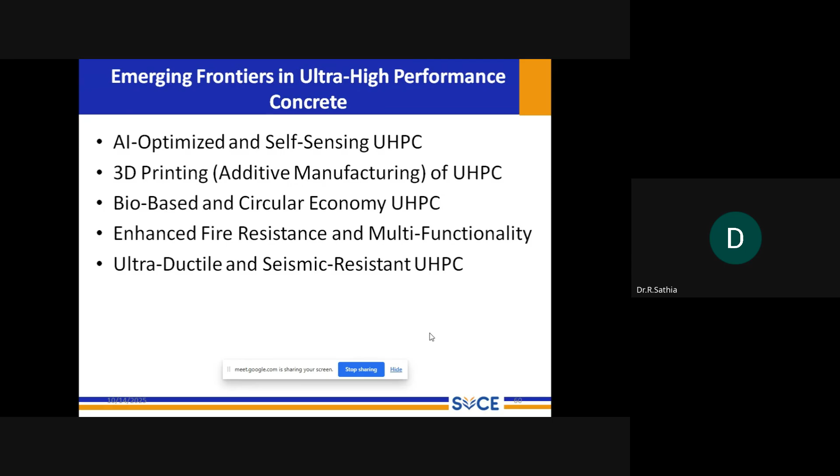So these are the emerging areas in UHPC performance, that is ultra high performance concrete: AI-optimized and self-sensing UHPC, 3D printing, and bio-based and circular economy UHPC. We can also work on enhanced fire resistant and multifunctional UHPC. Another area is ultra ductile and seismic resistant UHPC.

Concluding, if you see the evolution of UHPC, we are moving from high strength concrete to high intelligent concrete.

So UHPC is becoming a smart sensing material that does not only carry load, but monitors its own health and interacts with its environment.

So the next transition is from the laboratory material to the mainstream practice. It becomes a go-to solution for resilient and sustainable construction worldwide, from the lab to normal practice.

Considering the durability aspects, it is no longer just about lasting a longer time, but also about doing so in a way that is adaptable for future challenges. So to conclude, UHPC is a technology which is building the future of infrastructure.

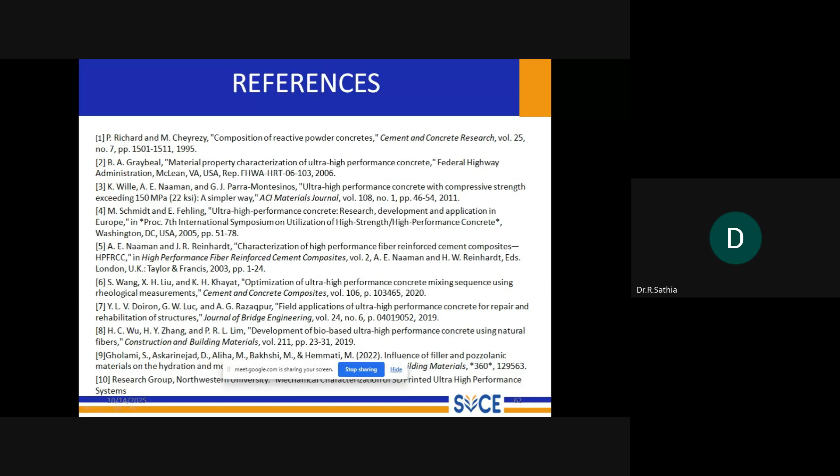These are the references I've taken. Thank you all for listening. It's quite a lengthy topic and is discussed in more detail elsewhere. Although I have discussed a few topics here and there, it's a very big, wide area where we can do a lot of research on this ultra high performance concrete. Thank you all.